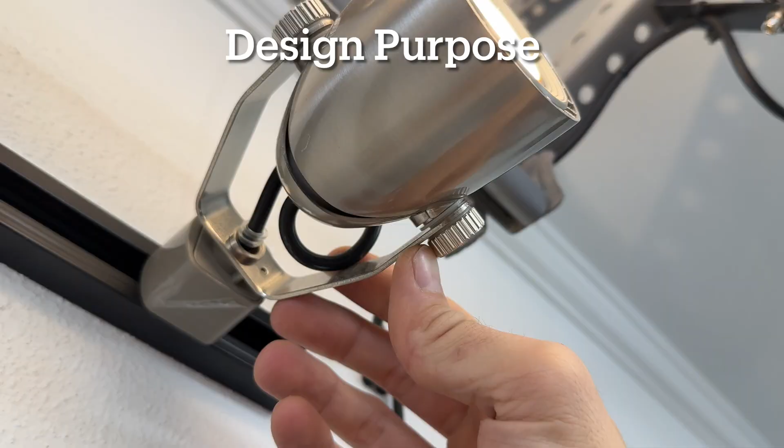Let's start here. Why did I want to make this design? Because I wanted to control a shaft through a thin steel wall. And why would I want that? Well, I can show you. If you look at these lamps, you'll see a thin steel wall and a pin, and the designers took control of the pin in the steel wall. Now you have an adjustable lamp.

If you look at this lamp, you'll see the same. A thin steel wall and a pin taking control of a joint. If you look at this fan, it's a thin steel wall and a pin, and the designers took control to form a dually supported joint. And the same is true here. We have a hole in a thin steel wall that gives us another degree of freedom.

And then if you look back further, we have still a pin in a thin steel wall that carries a load and takes control. If we come over to this television and look at the mount, we have a 4-bar linkage, and we have a pin in a thin steel wall that supports it. And then this beam is just made up of 2 more thin steel walls that are constrained also by the pin. And all throughout this design, it's the same.

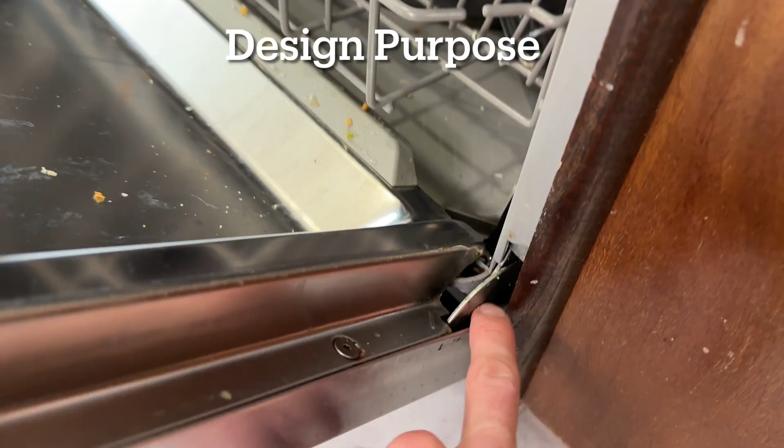If we look at this dishwasher, we have a smooth operation and a supported hinge on this door that's based on a pin going through a thin steel wall here. If you're relaxing on the couch, you're supported by several pins in thin steel walls. And the friction and the movement and the freedom to move is all controlled by the materials and the decisions around that pin in those thin steel walls.

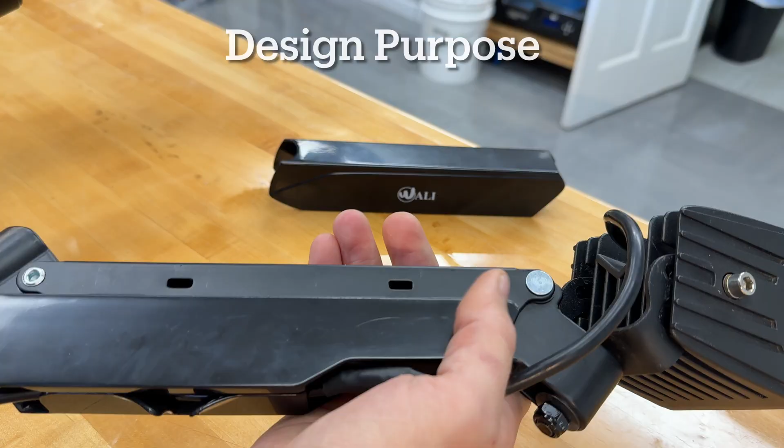If you take apart a monitor mount, an adjustable mount, then you will find these beams that are made up from a pin in a thin steel wall for all of the joints. These are just covered in plastic. In fact, you'll notice the whole world revolves around a pin that goes through a thin steel wall.

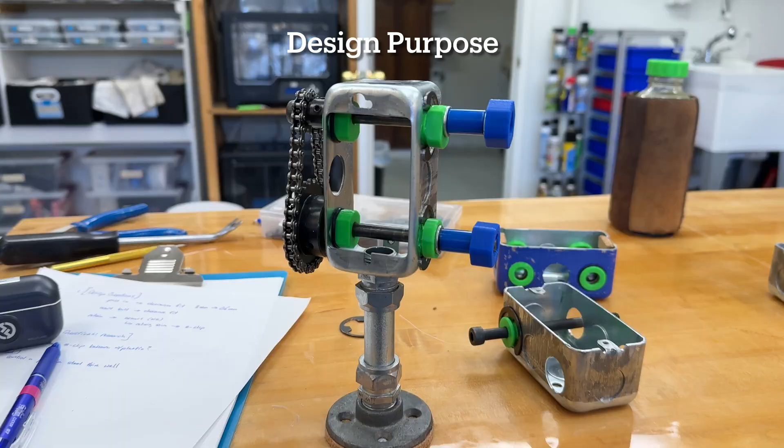So I produced this sleeve and its variations to begin to have for ourselves a set of answers that take control of pins going through steel walls. This apparatus here gives us a gearbox, but the more important thing is to have a really nice set of offerings that give us that control and give us the ability to adjust the design to manipulate that joint right there.

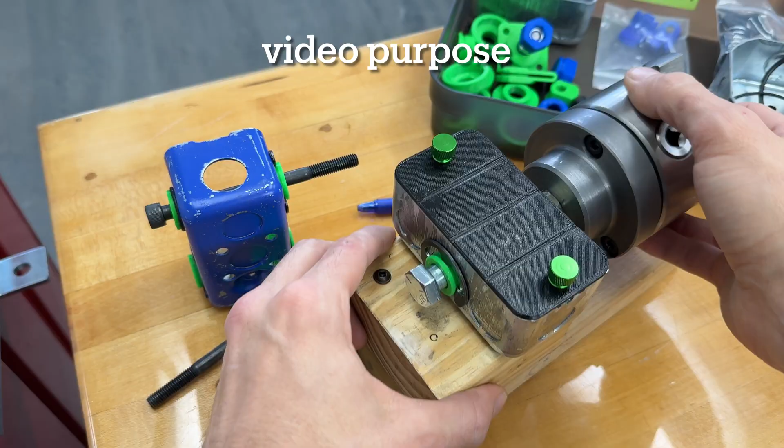You may be getting new ideas on how to plan a design for multiple assemblies and what assemblies are possible to be built with 3D printed parts. So this is another integrated part with off-the-shelf parts, and so I'm using keyword Printegrate for the online posts that have parts like this. And as a designer, even if you're not a mechanical engineer, you should gain some insights as to how you approach the specific problems.

What problems do we encounter when we're trying to create something from scratch to do a job? And how does a mechanical engineer think through a design process and make steps out of it? I should also mention that we're still on track. From 6 months or a year back, I showed people how to throw together this simple joint bracket that holds a big fan, that allows you to position it, that is simply made from the same components we're going to look at today.

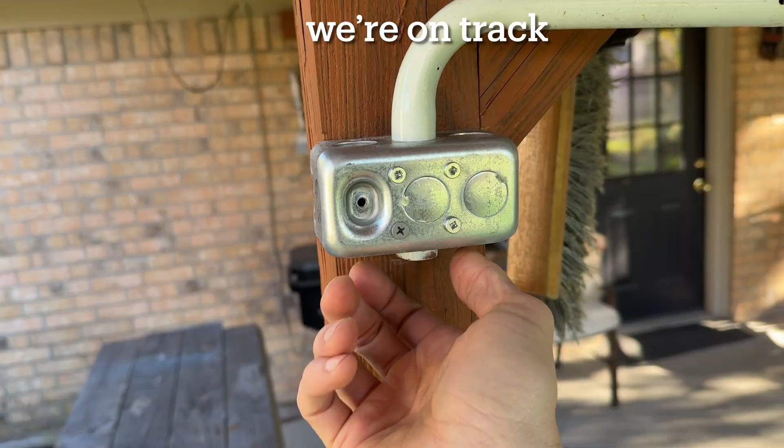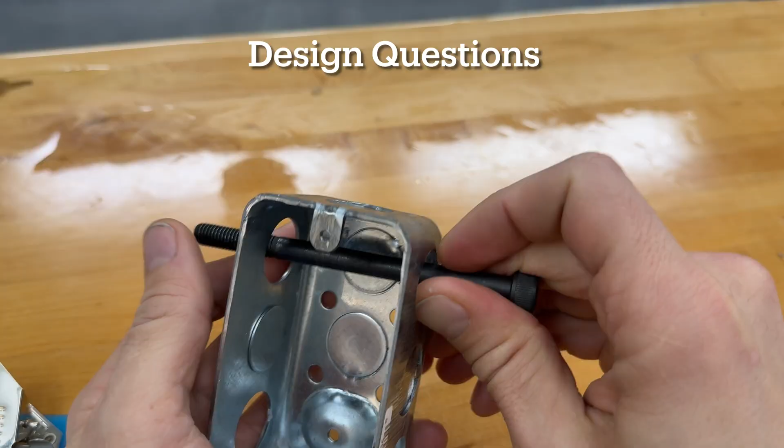And the next steps are to be able to take more control over those joints to control the friction or the clicking. And that means we're going to need some sort of components that give us access to manipulate the joint. And that's where we're going. So I want this bolt to go securely into these holes. Let's just consider one hole. How do I get the bolt to fit?

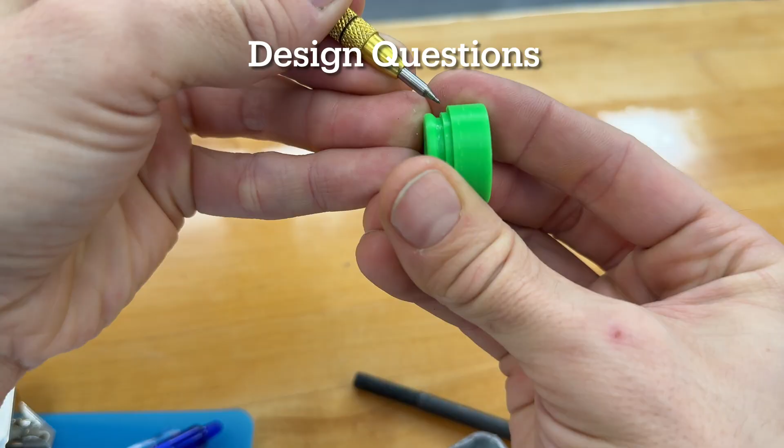Well, I'm going to use a reducer. So I'll reduce that size from large to small, 8 millimeters. How will such a reducer install into this wall? It's going to have a slip fit. It's going to just pass in without pressing. And so that answer of the slip fit is defined in this diameter here, exactly where you'll see the flush wall of my steel on the flush surface located right here.

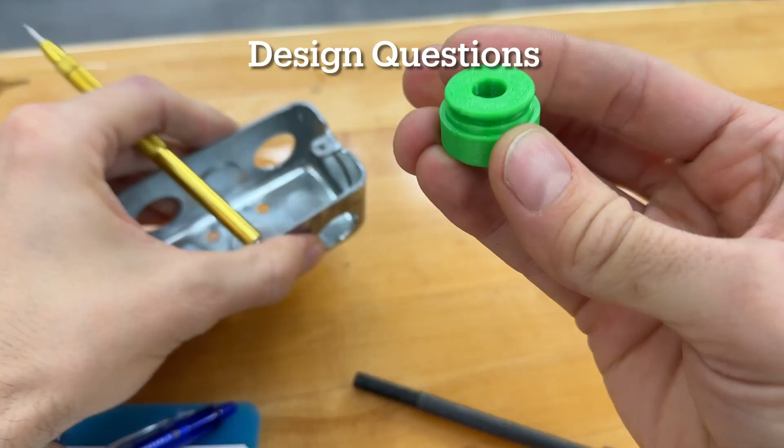How will I prevent the sleeve from passing all the way through and have it just contact and stop here where I want it? Well, that's going to be defined by having a diameter larger. Instead of a slip fit, we're just saying, depending on this diameter, we need a millimeter or two larger than this 22 millimeters. And so that answer is embedded in this diameter right here. Okay, so we have something thin that slips in.

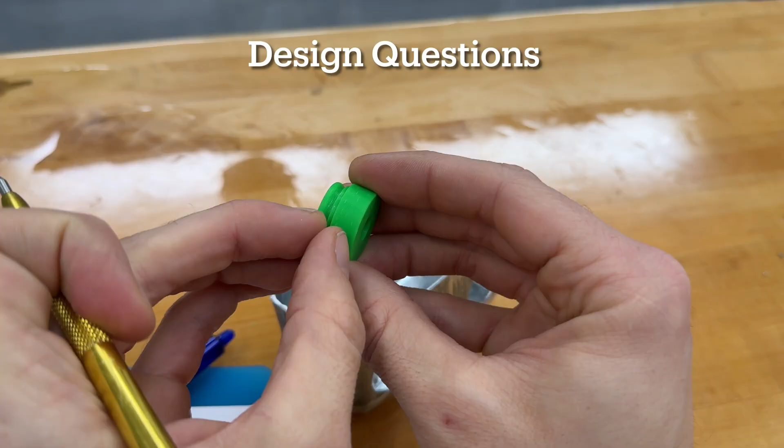Conceptually, we said, how will the bolt fit into this reducing device? Well, it's going to also have a slip fit. And so that hole is defined by the diameter of the screw plus some amount that gives me the clearance fit. And that answer actually is a routine answer, and that lives in a set of design rules.

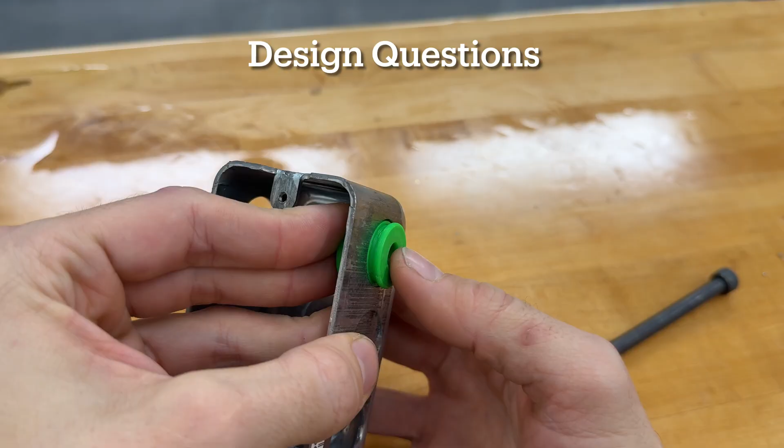Okay, so then we ask, how will we install it? Or rather, how will we secure it after we put it in? And it's going to need some kind of hardware or fastener or clamping. How do I maintain this flush against that wall so that it makes contact and we don't have movement in this direction? So that's answered first by an E-clip.

This is fairly standard in some automotive applications. And they're ubiquitous, long-standing parts found in several trades, found all around, low cost. And so I grabbed one of these to try it out. Now, how will we mate with the E-clip? How will we make sure that this thing accepts this E-clip?

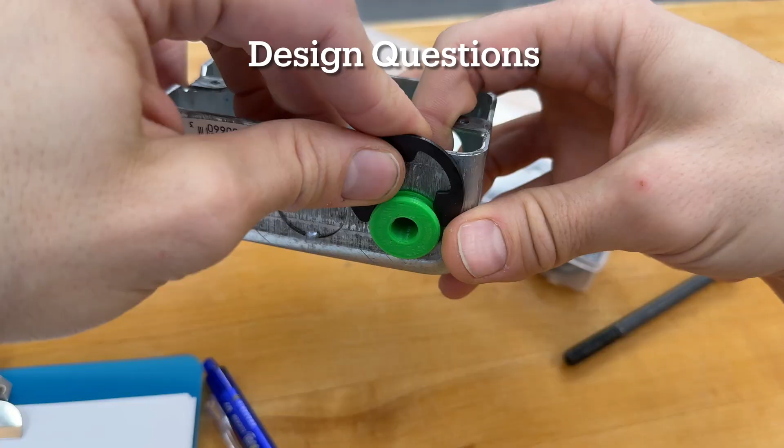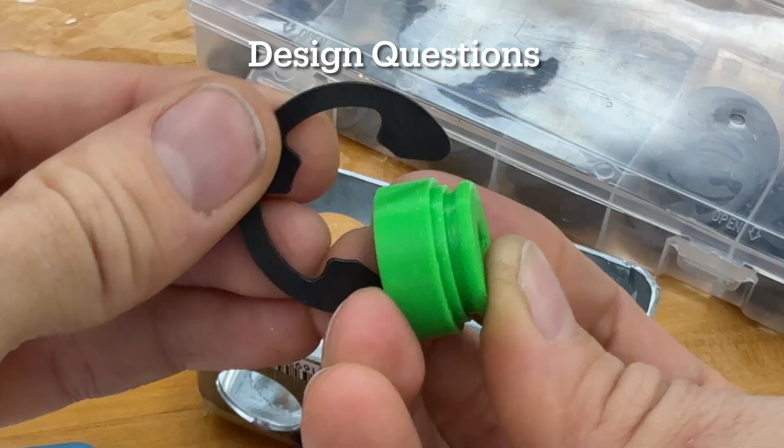That is going to be a matter of, these are designated for a certain diameter, essentially the diameter you'd measure around here, plus or minus some range. And so we take that information about this diameter and that gets plugged into this groove. So we have mating, let's zoom in. We have mating with the wall, then we have flush with the interior wall, and then we have a diameter here, and that is an answer to the question of what diameter will fit with the E-clip. Retaining ring, or C-clip sometimes they're called.

And then how wide of a groove do we need to accept this E-clip? Well, that's also defined by the E-clip geometry, and it's relating to the thickness of that E-clip. So we make a groove equal to that thickness, and then you can see it seems a little bit larger, but it's tapered.

And that is a question of, how will my 3D printed model allow 3D printing without supports? Well, then we're not going to have overhangs. That's the answer to that question. And so we add this chamfer here, that's going to eliminate that horizontal overhang. So that makes it easier to 3D print.

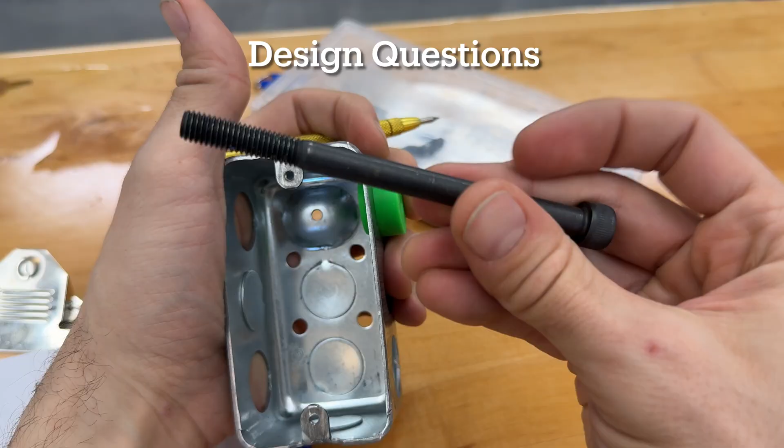So you can start to see that each one of the design questions can be enumerated, and if you're designing systematically, they can be matched to a feature or a dimension inside your CAD model. Once we got that far, then you would have this bolt or shaft pass in, and it would probably start to wobble because we have a slip fit here. And so you have some play that's going to be allowed unless these are drilled. Post-processing, we want to eliminate post-processing.

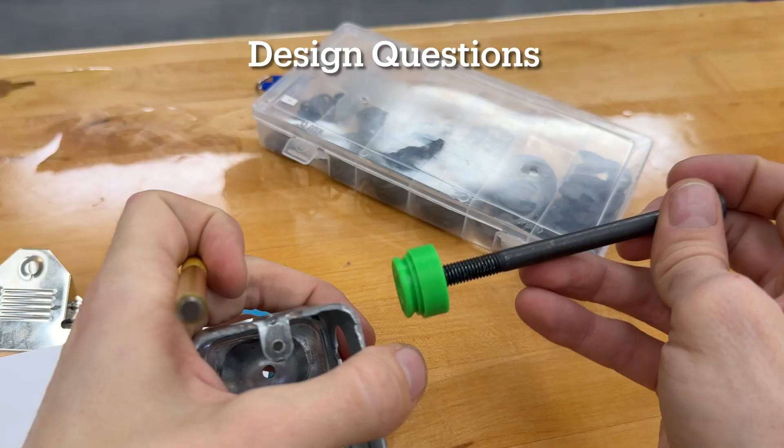So how can we keep it from tilting this far and this far? Well, then we're going to add a thickness on this side. Prior to this design question, we didn't have all this thickness. We just had a millimeter or so here, which is less support on the shaft. So you can imagine now we're contacting the shaft in a range, let's say as wide as my finger. And this is a ballpark choice of 10 or 12 millimeters. And it is simply large enough to control the alignment of the shaft in general.

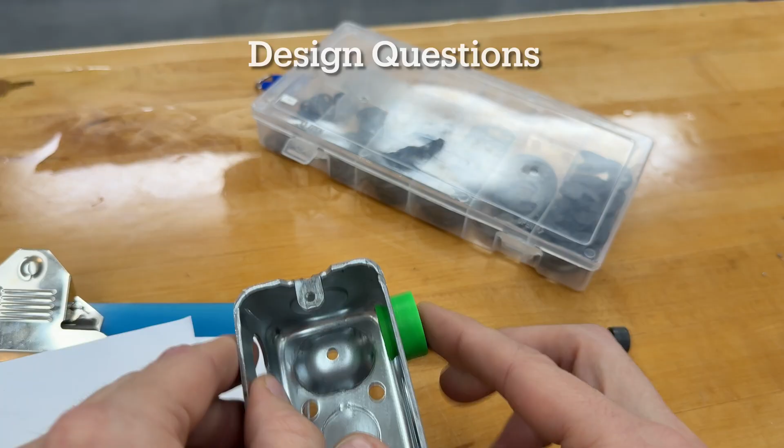And then controlling more carefully will be the job of having 2 of these that will increase the constraint from this narrow range to all the way out here. Elongating that constrained circular region gives us a more careful alignment of this shaft being parallel to the floor where this is set down.

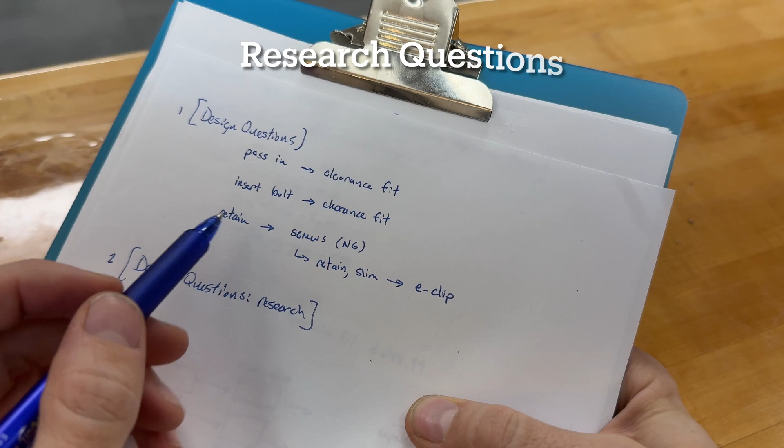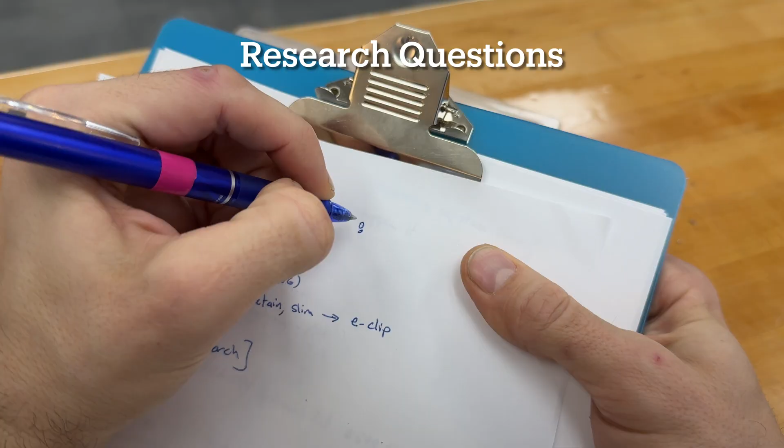All of the questions so far that are answered in that design are general design questions. By that I mean that these answers can be borrowed from other parts. They can be taken from my design rules because I'm using those answers all of the time. For instance, what is the size of the clearance fit? Well, we took an 8mm shaft. Then we always add 0.6. I always add 0.6 millimeters to that design for 3D printing, in the case where we're printing in this direction. So 0.6 is related to overbuild, and I'll talk about that another time.

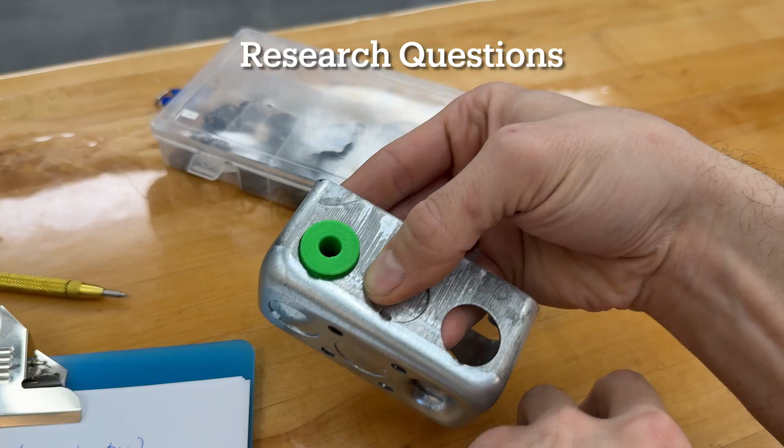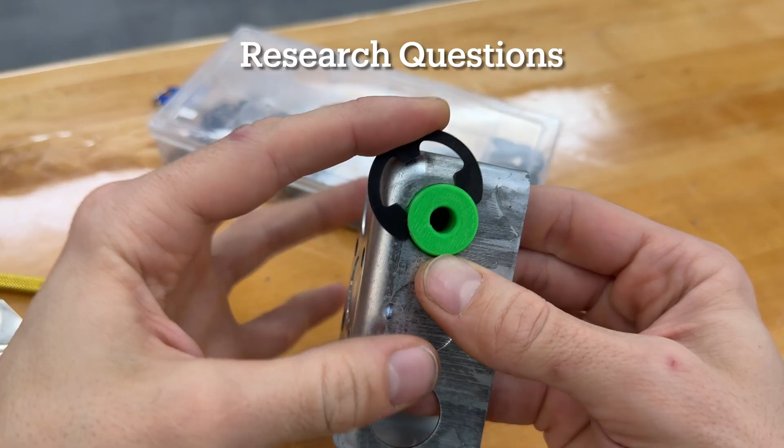Then you have the questions that are a little bit more detailed, such as if you place this in here, and then we're using this retaining ring, which is designed usually for contacting metals. It has a really strong pinching force in this direction, and it has that force concentrated on these narrow regions when it's being inserted. So then the question is, is this metal going to be too much force? Or if I install this 2 times and remove it, is it going to damage that printed plastic?

And if I'm just printing with ordinary settings, then I have a hollow region. Actually, this is 30% infill on this part. Am I going to have a fight between my printer settings and the survival of this plastic? That is something that we can't really compute.

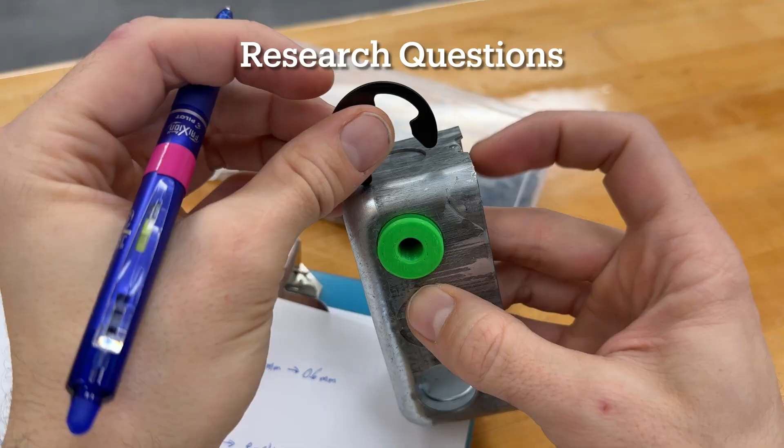It would be unreasonable to try to put that into an FEA simulation or something when you could instead just print the part and do some verification. So we're going to specifically observe, this is my activity, specifically observe pushing this on.

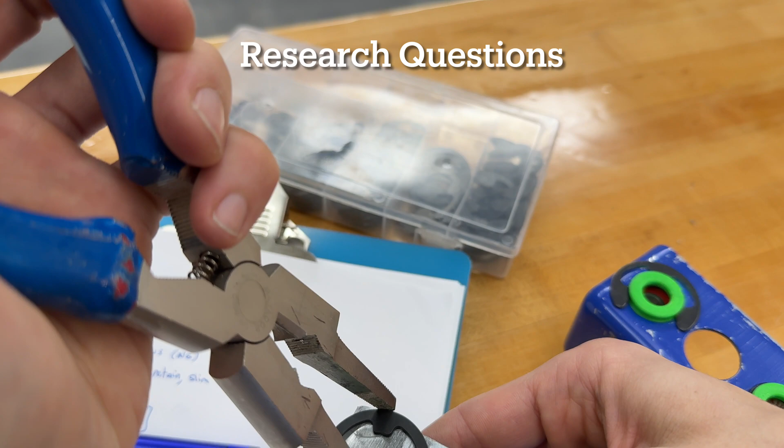The answer to that question was interesting. I was able to install this multiple times. The installation goes with some pliers. You'll need a tool because it's really hard to push that with your fingers. And well, I don't know if I can demonstrate right on camera, but okay. So it goes on pretty neat.

And when I remove that, you will find a little bit of superficial damage on the plastic. It looks like it's not changing the net shape, but the plastic is surviving good enough we could get by. However, installing and uninstalling multiple times leads me to discover that that's just difficult. And if you use a tool, you're going to have to be very careful not to jab your fingers or something like that. And so I've modified the C-clip in this case.

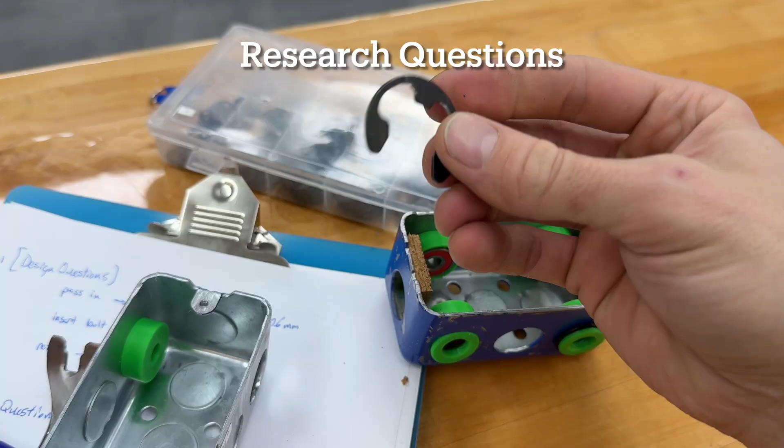So this C-clip is the exact same part as this, but it has been reduced in the spring force it takes to close it. The net interior diameter has no change, but we've reduced the spring force by reducing the thickness of that spring region, just by grinding it out with basically a Dremel and some carbide. You could equally do that with a file.

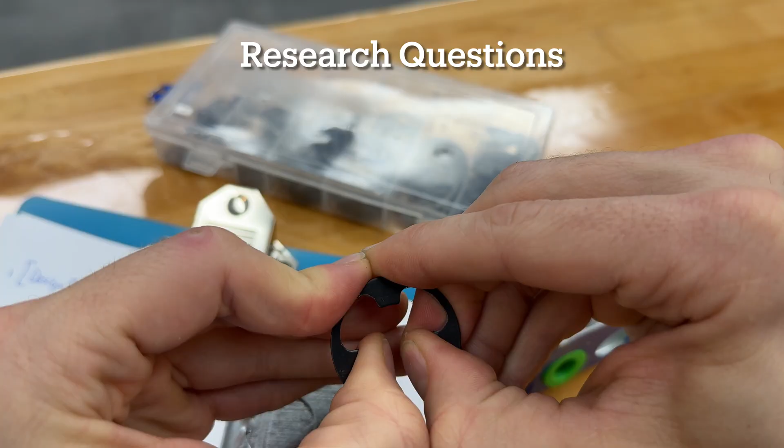And so that was the answer to the research question of how does it work out trying to install these on plastic. And it's a little bit easier to handle it with your fingers and just get a sense of the force that it's going to take to install it, etc. So now we have a brand new option. We have the option of if your off-the-shelf part fits nicely, you can do that.

But if you want to be able to turn it and adjust it, let's say this edge is going to interfere with the interior corner of the wall. So you've got to install it this way, etc. You get more control by taking a moment to grind these, or you could grind down the corners, etc. It can go further and further, the discovery of options that you have.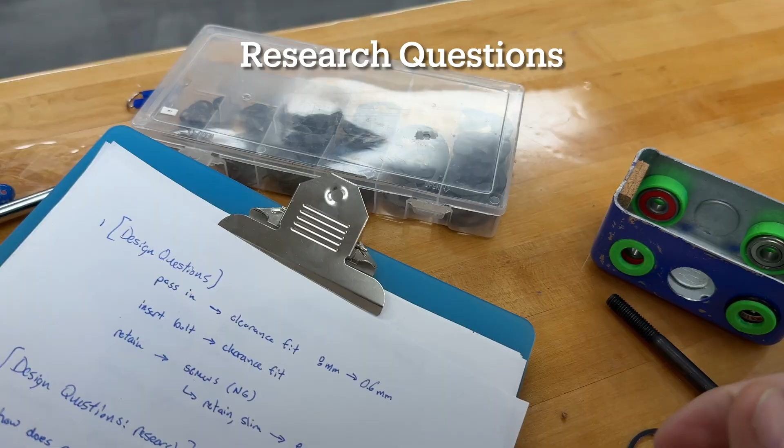But the simplest option is described simply. I can measure this and prescribe this for the design and say it's going to have an E-clip, and you're going to have only 2mm spring arms on it. And so I would consider that type of question that requires some exploration and data gathering the research design questions. But once these are done, once we've accumulated these, and I've accumulated a lot so far, we then have new options that we can just copy and paste in other designs.

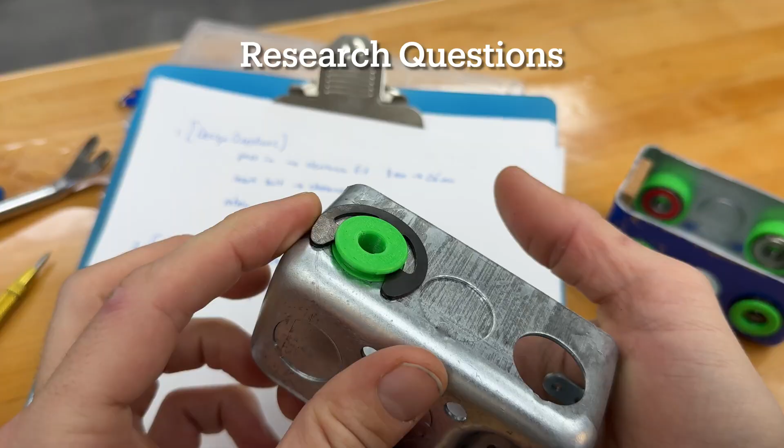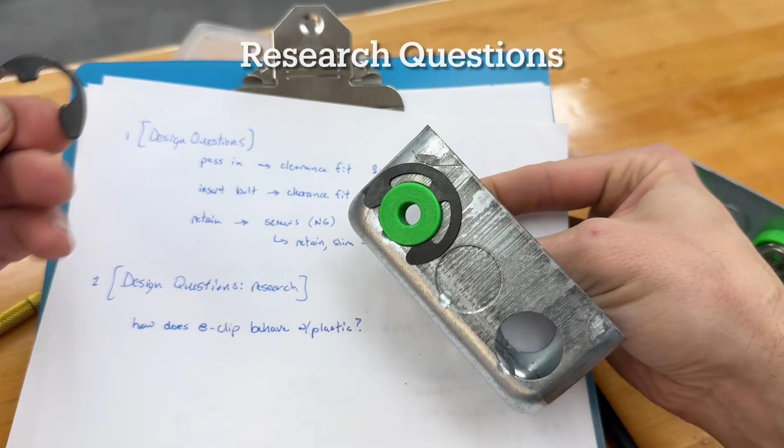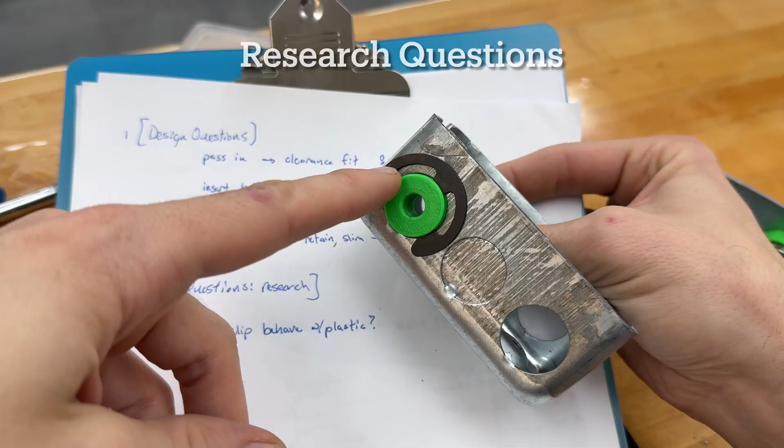And since these are extremely popular, and 3D printing with ABS is very popular, if I include this data, other people can reuse that solution in many other situations. It's just a matter of how many research questions, which questions am I answering in my documentation, and how do I describe that sufficiently to transfer the understanding to the audience. That moves it down from a research question into a design question. The next person can just say, how do I retain the thing? Well, I can use an E-clip that's been reduced in its spring force.

Okay, so all of this design discussion only matters if the assembly can actually bear a load, which it can. So I'll show you jumping ahead and running a test on one of these parts. Just understand there's a few variations. You'll see the one that has the bearing, and all these variations have the same geometry in common, which bears the load. So we make a press fit of the bearing into the part, and then we install it.

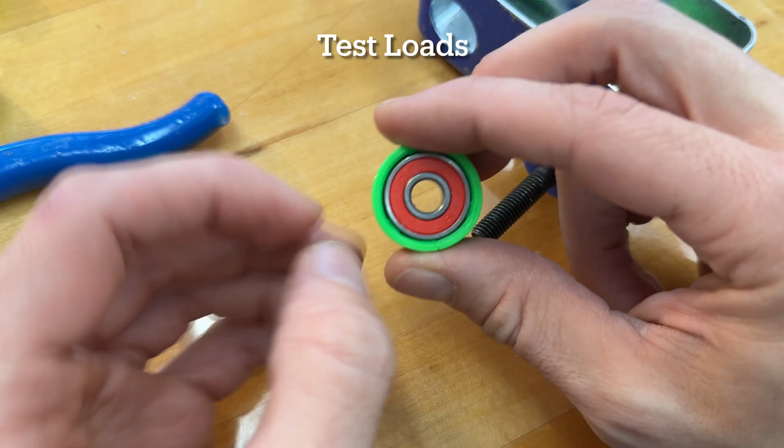And what we're going to have is when the shaft pushes down on the bearing, it's going to want to tilt like this. It's going to be pulling on some of the features because there's a moment on the part. Only if the bearing was centered directly over that wall could we have no tilting or twisting and no moment. So given that constraint, that limitation, how much weight can we hold? So far I've tested only using this method.

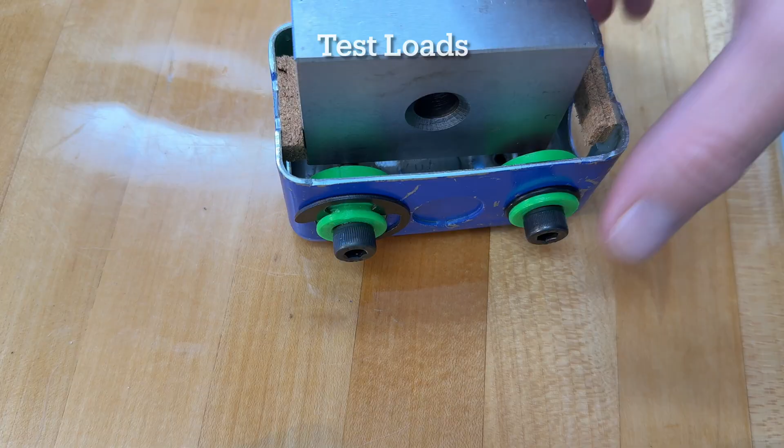So I set a block on top of those shafts. I keep it from slipping out of place with those pieces of cork, and then we can start pressing on it. And to press more, I can come over here, set the wood on it. I'm going to steady my hands on this bench, but I'm going to put my weight on the assembly.

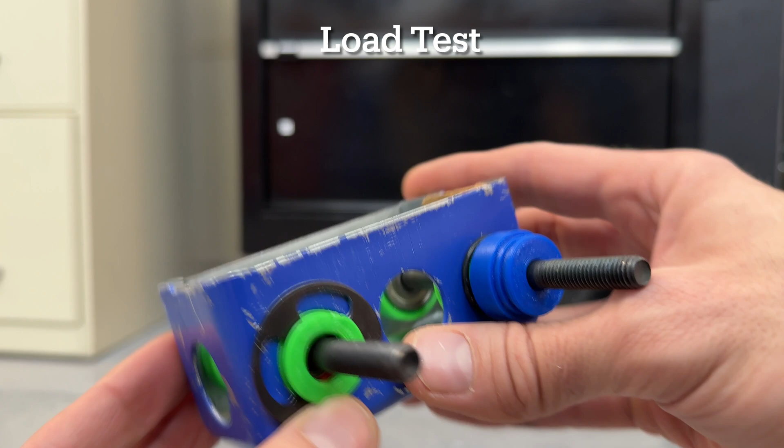Okay, so I can stand on there. Oh, I just tilted back to my heel. I'm sure that I just put all of my weight on there. And so we have no problems, no defect from performing these tests.

So that, even if we don't use it in that heavy of a range, we have a really good starting point to know what applications, what span of loads we can tolerate on an assembly like this.

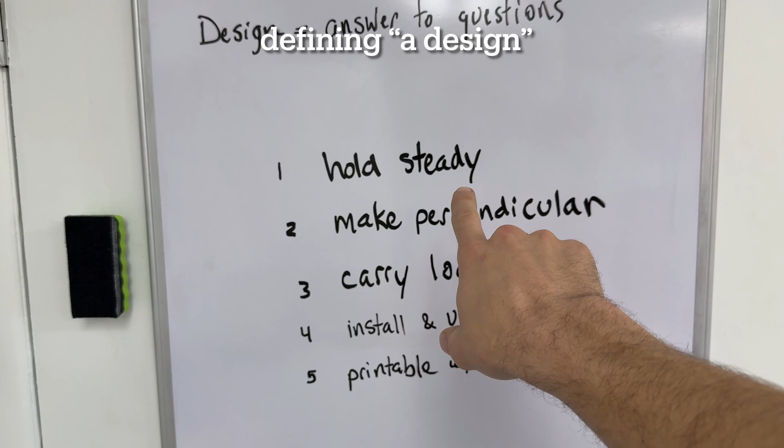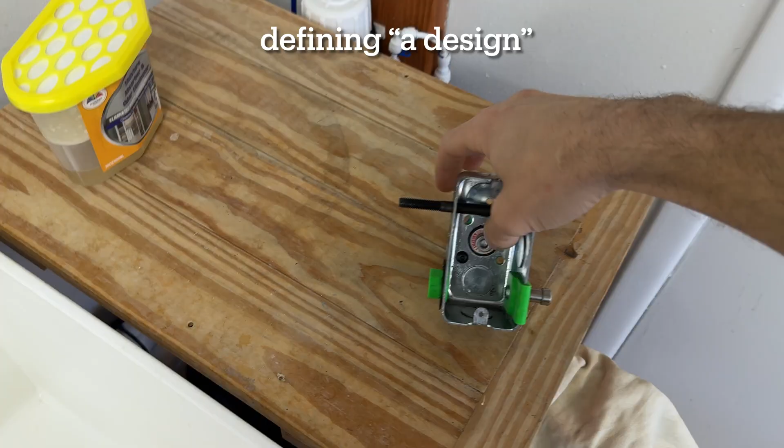Okay, now I'm going to voice over a little bit and improve this explanation. I took a moment to carefully define design because we have a more complicated situation than a typical design. We're creating a parametric part, and then that part is developing sister parts or children parts that have some similarities and some differences. The first 5 questions that I wrote in black are considered to be the questions answered for this initial design. The bushing style part, which has no bearings and it has the simplest geometry.

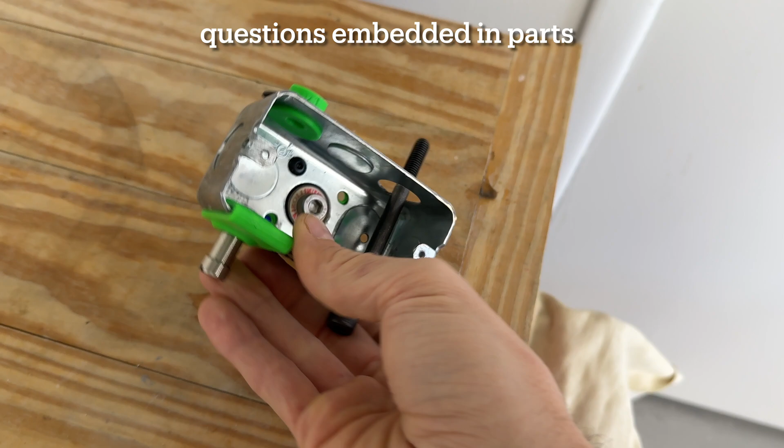Each of the numbered items, such as number 1, it says hold steady. That is corresponding to a question. How will we hold the shaft steady? And we mentioned the answer. It's going to have a slip fit, but it'll sit resting on the interior hull of the part.

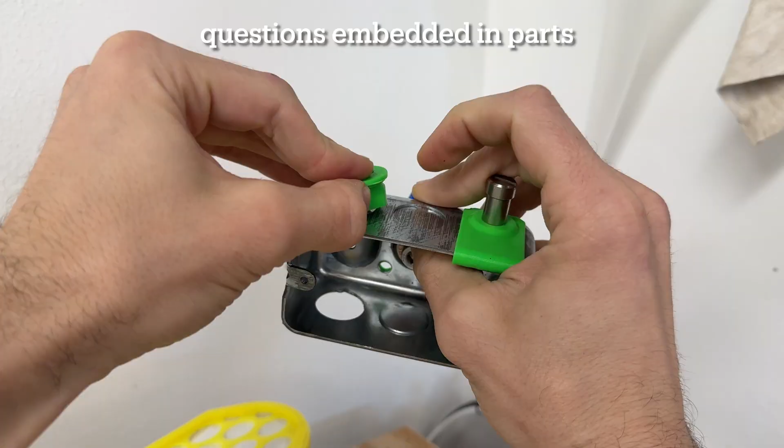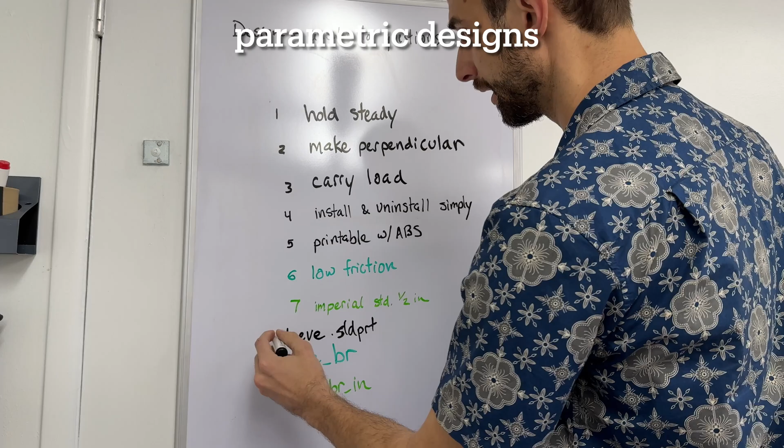And so each of these questions, well, these answers aren't written down in words anywhere. They are built into the geometry of that physical part. And they are stored, for instance, in the CAD model. They get carried over to the physical part that gets printed. So when I publish this design and call it sleeve, that's sleeve.sldprt. That's a design that takes all questions 1 through 5 and delivers an answer.

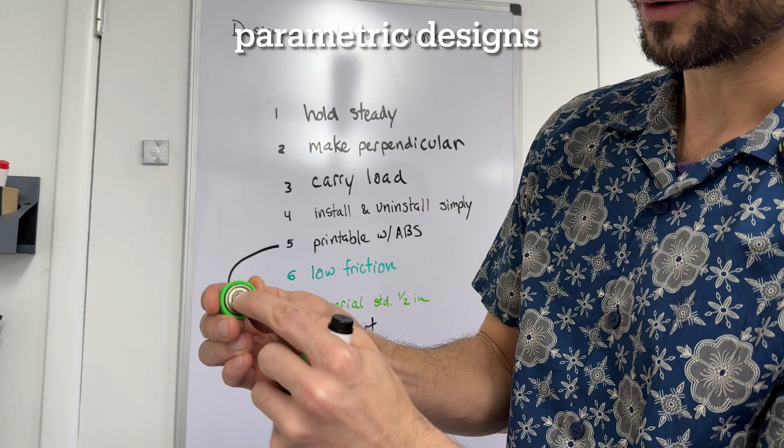And then to demonstrate adding on another criteria to the same set of answers, as intended from the very start, we have the same design where most of the features are in common because those features answer these questions. So sleeve BR is for a sleeve with a bearing, and it simply has a widened shell, and now it carries this bearing for an 8mm shaft. It's a 608 bearing. And so if you want 1 through 6, those are in the file called sleeve BR, but the file starts to get more complicated.

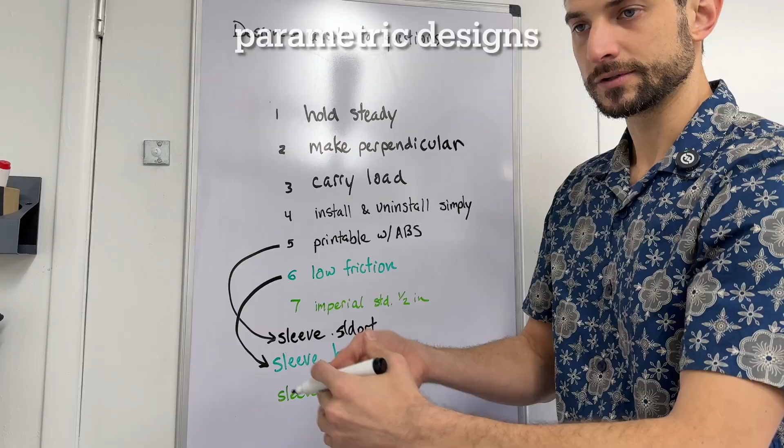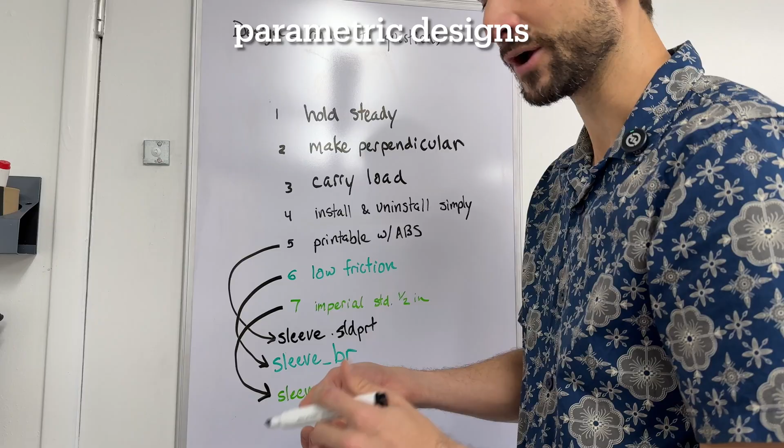So this is where my methods break off from traditional engineering design methods. We have a second part, which you could consider a version 2, that enhances the design for one specific application, but not for every application. So I want to take this group of features, all in the CAD model, where we have answered a cohesive set of questions before proceeding, and save this and give it a name, and then describe in documentation what is the function of that specific part, so other users can download and access and reuse the solutions that are already embedded in the part, and then proceed to make a second version and give it a name.

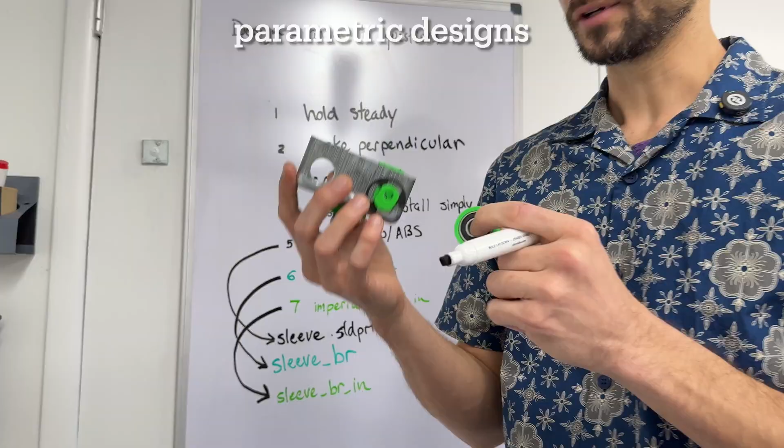So here are these 3 parts side by side. Sleeve, which was made first, sleeve BR that was derived from this one, and BR inch, which was derived from this one. And each time I made changes to add value, right? But some of those changes remove value that lives inside of this one. So for example, if you want an assembly that's low cost and minimal, you don't need this ultra low friction, then you wouldn't want to spend the money on these bearings. And so each one of them deserves to exist. That's why I'm publishing multiple solid files instead of just one.

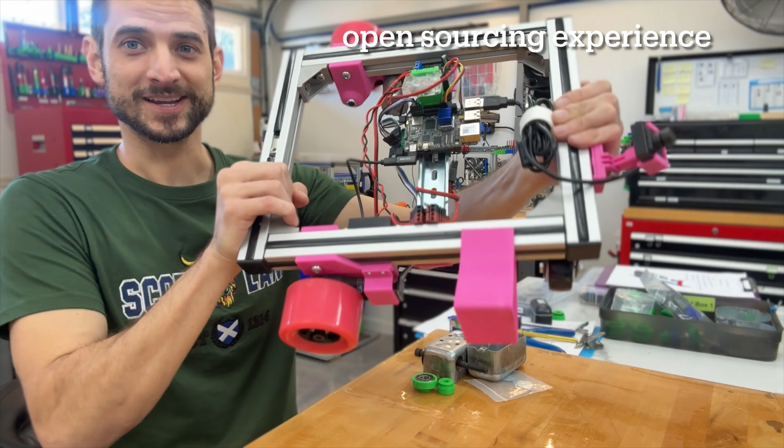I'll add a personal note here that can only come from experience. Okay, so you have this open source robot. It has 100 very useful, very versatile components. It was specifically designed so that the modules inside would have their own value in student projects. That's all related to my role as an educator at the university. But inside that design, nobody is actually discovering the parts and the components and the value of those parts.

So I've published this robot, we're talking years ago. Let's say you get 100 downloads on GrabCAD and truly any other platform. No one's expecting that we're designing in this way to actually help them. So I'll publish this, get 100 downloads, and then separately later, I'm like, there's so much more in here. I'll publish the design of this little fan or this little terminal. And that design will get 5,000 downloads in a month.

And it's just showing, it's because no one is expecting that the assembly and the parts inside of a large design are made up to the quality that those components are actually helpful to them. And that makes sense. It's not an ordinary thing. We don't put the details usually into all of our parts in such a manner that this bracket here, this design that I publish on the robot, is more useful to you than getting this design from the manufacturer, because I cleaned up the model and made it easier to work with and added names and datums and everything that the engineers need to proceed from there.

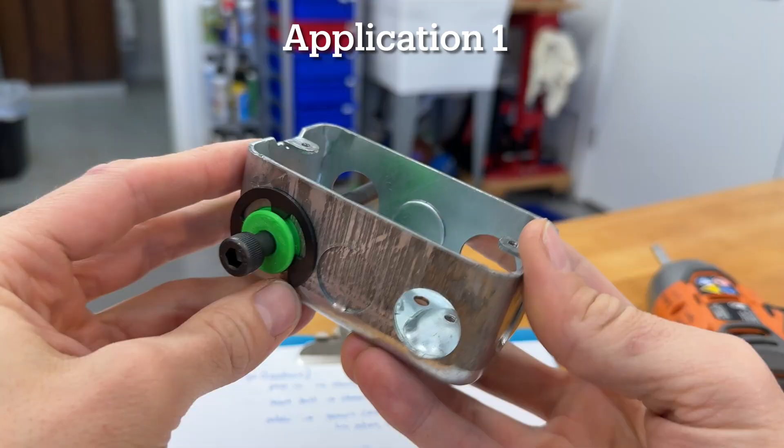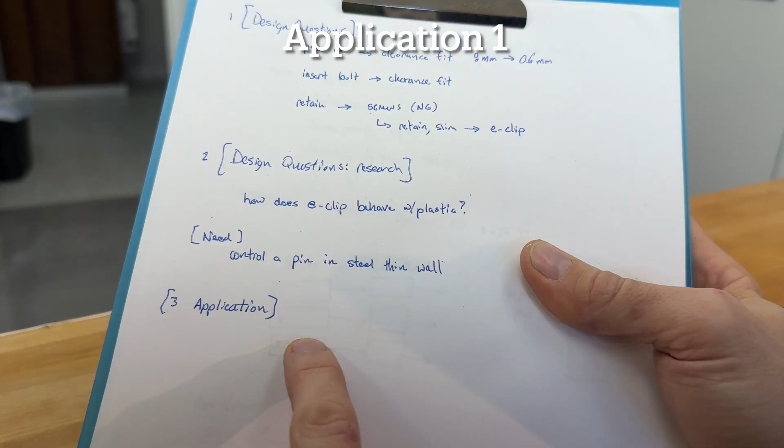Okay, we have a design, we have a sleeve. Now, if we install 2 of these, we support a shaft. If we install 2 more, we could have 2 shafts. Maybe that's the simplest application we can go to. But we covered design questions and the need. Now, one of those needs can fit in an application, and that looks like this.

We have a gearbox or a belt box, not sure. Anyway, we can use a chain, or we could use any other driving mechanism, such as a belt, or even a simple O-ring made to be used as a belt. In this case, we have a 25-tooth pulley on the input shaft and an output shaft with 10 teeth. So it's a 2.5 times increase if we're driving the system from this side.

So if I drive it with my driver, it spins. We have everything moving. And this can handle a fair amount of torque. There hasn't been much testing yet. But in any case, that works. And so we could continue with that example. What might I get? What would I want that for?

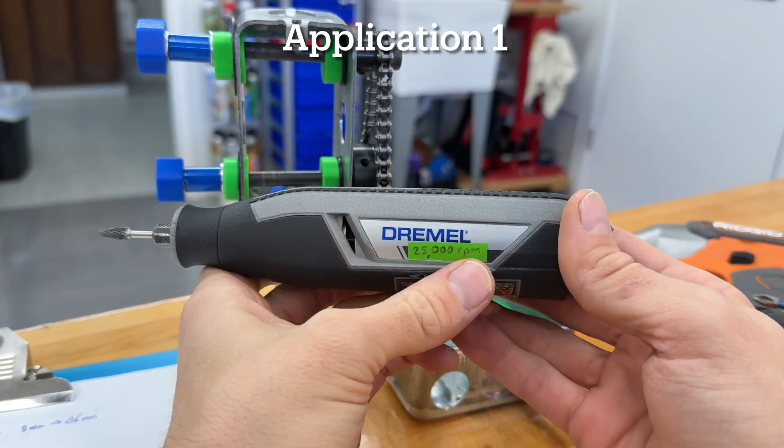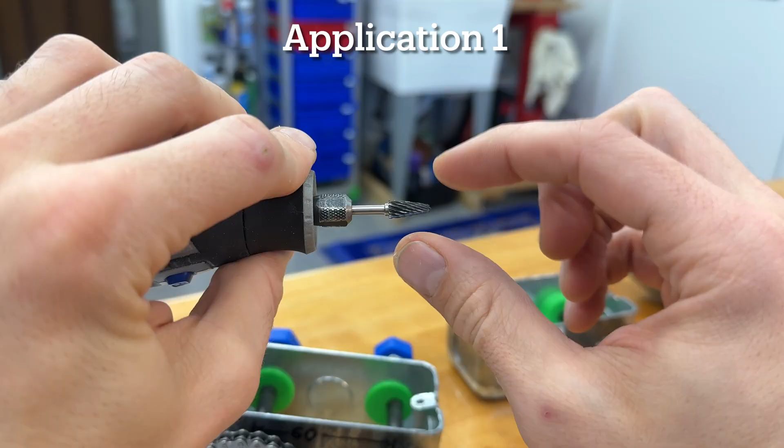One example is a high-speed tool, just like a Dremel, only having more torque, which is something that I very much need. We could make this to be mounted on a bench top, and that's something I actually want, a bench top mounted driving tool to drive these tools that have a 1/8 inch shaft or 3.2 millimeter shaft, like this carbide burr, because when you have this high speed, it's a whole different range of utility compared with the lower speed tools.

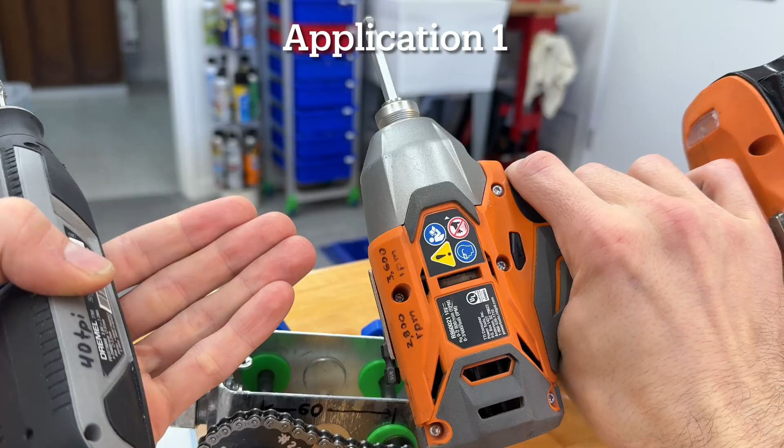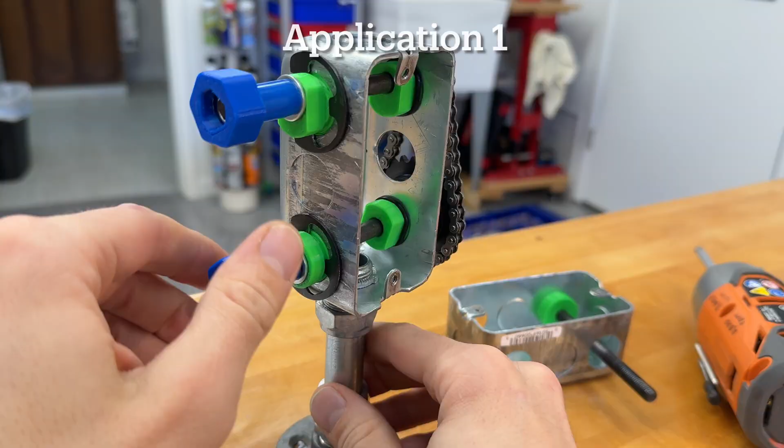Almost everything in our shops is somewhere around 3,000 and less RPMs, whereas this one goes up to 25,000 RPMs. And it really changes the functionality. It changes which devices you'd want to connect with it. And so I'd like to work towards that, and maybe many other people will work towards their own applications or the same, and that can be a collaborative thing. But at least now we have one demonstration that we can make our initial observations and start to test and examine what's possible and what would need to be adjusted.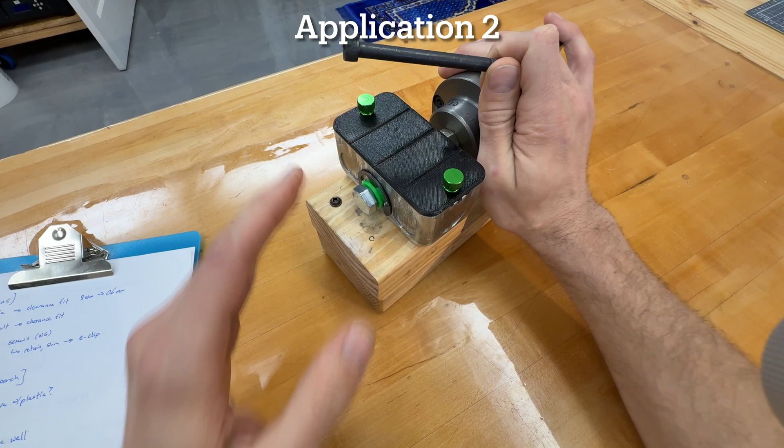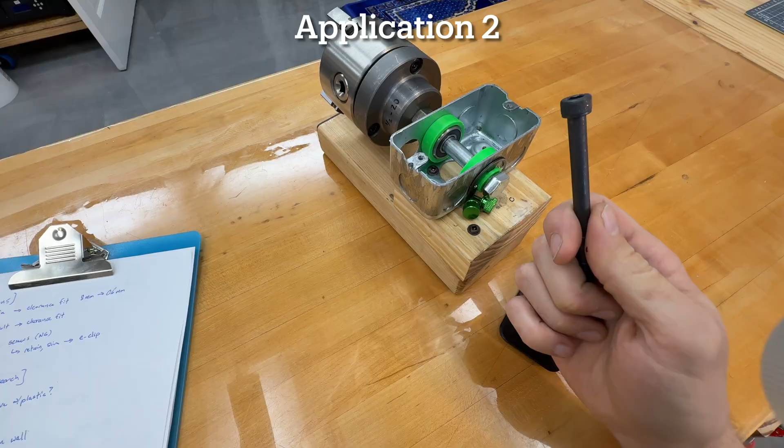The next application demonstrates meeting a completely different outcome with mostly the same needs. And so this same sleeve is being used. And this is a variation of the model, mostly with shared features and then the added bearing. And this is the bearing that has a 1/2 inch inner diameter. And so for this part, 90% of the work was already done in the initial design. We add a very small effort to accommodate that bearing, and then we can do a completely different thing.

I'm not really intending to use this assembly. I wanted to tinker, and I wanted to explore, well, how much load can we put in this steel box, and how much will things fall apart if we start to spin it? And so that is a significant amount of mass, and that's just giving me more data that I can use to decide on what configurations, what are the limitations of the parts directly 3D printed as they are.

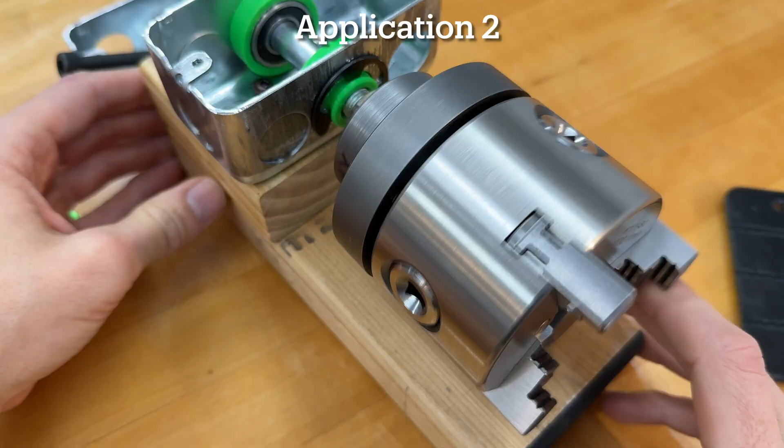Well, this whole situation starts with observations. I don't have too much to say about it because this was a quick project just for me to play. You can see I screwed these into the 2x4 just to get something mounted and to be able to get this lathe chuck spinning. This is around $60 on Amazon, and so now we are seeing this printegration.

Integrating these off-the-shelf parts gives us easy access to start configuring a machine however you want to, if you want to configure the drive, the driving input, spinning shaft the way that you want to, and the speed that you want to. Now we're starting to get that freedom.

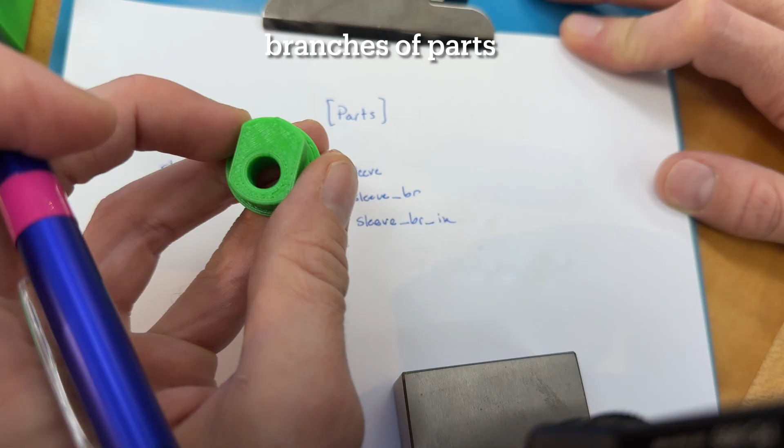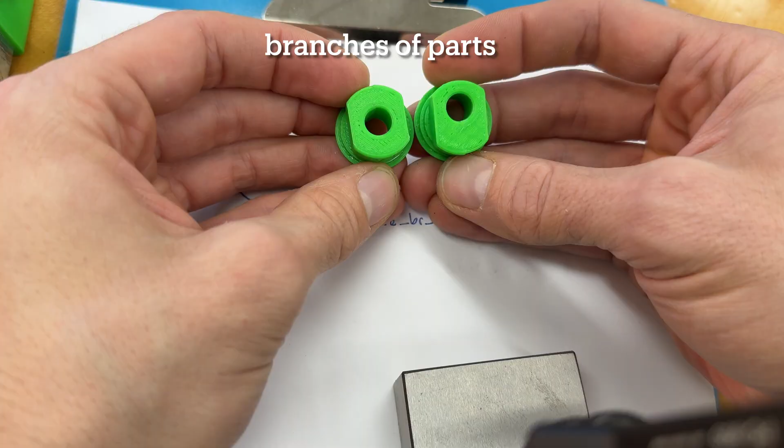So we basically have these three parts forming a tree where most of the work and most of the trouble to find answers and test things out was performed on this main branch, that sleeve solid part. These ones are derived. Okay, now why do I not just make three configurations of one file? Why am I publishing three files? That's where we come and we find that there's been branched off already this sleeve variation where we have the offset and the centered version. Those already come from inside of sleeve.

And so you have sleeve OFS for offset. That's the one that has the 3 millimeters moved over center line. Okay, but the sleeve OFS, this is a configuration inside of sleeve, and it's defined by having this dimension here where we have our offset distance. And so that's offset. That's a variable that lives inside the CAD model.

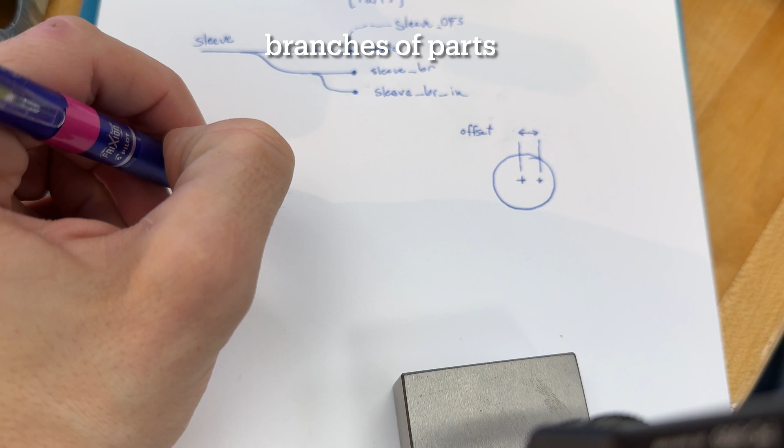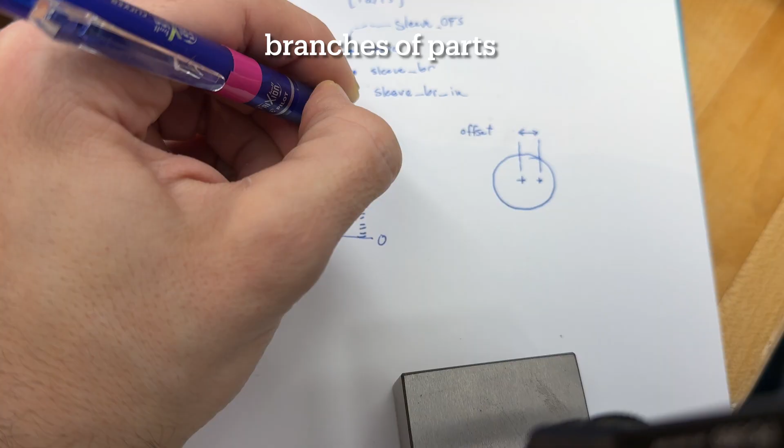And any designer can open up the file and adjust that. And so we have not just different configurations with this parameter, but a whole range that you can make this 0, or maybe you can go all the way up to 5 millimeters. And you can place that anywhere that you need to.

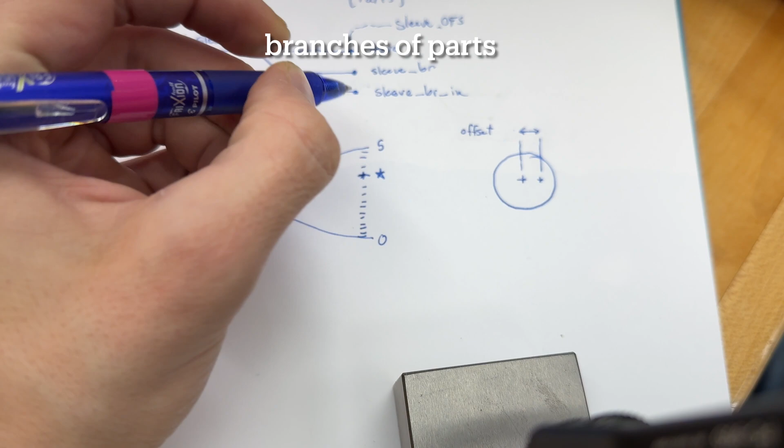And if I were designing the next assembly, let's say I'm going to use this rubber belt and I want an exact offset, then I'm going to choose a new value for this. And I'm going to then produce, let's say, the STL model and then print. And this may be saved inside of a folder that has all the other parts for my belt-driven assembly. So this is one parameter, and that's the offset.

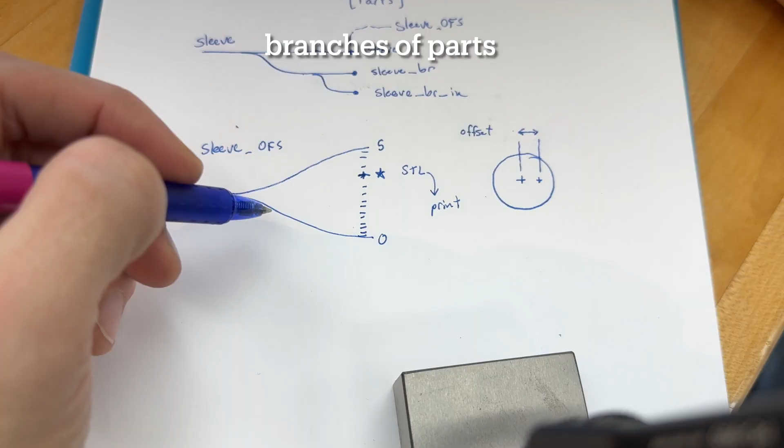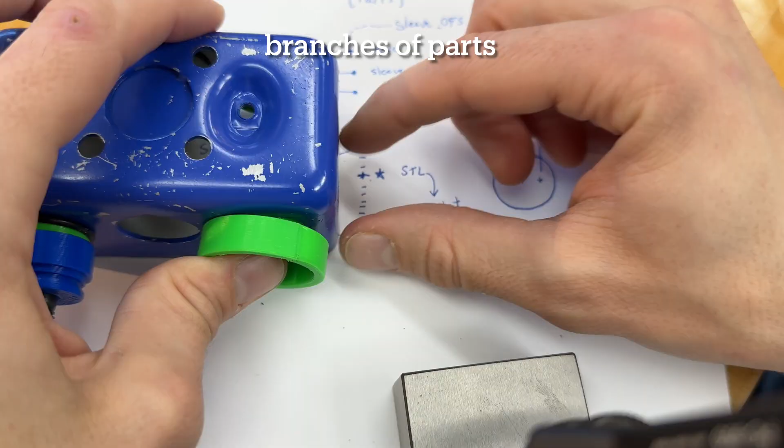There are a couple of other parameters as well. So for example, this series of humps that's intended to mate with this is called a 1/2-inch trade size. The hole in this box, it's because it goes with the 1/2-inch trade. It's much larger than a 1/2 inch, 22-ish millimeters. That goes with the EMT conduit, that's 1/2 inch. And we have 3/4 inch. And we also have unlimited numbers of holes in every other thin-walled steel or metal apparatus.

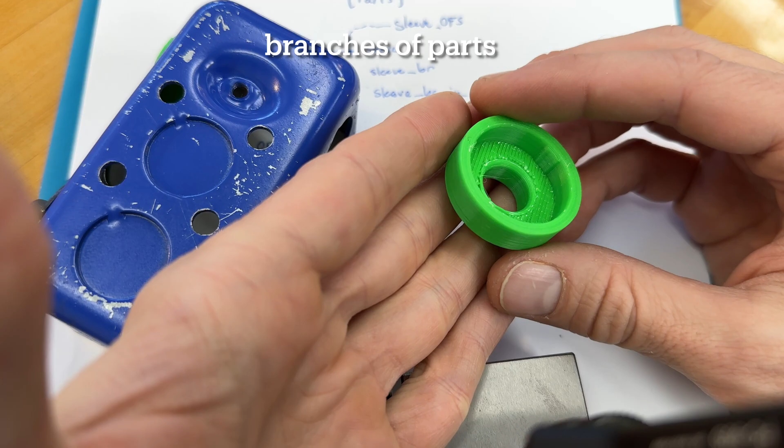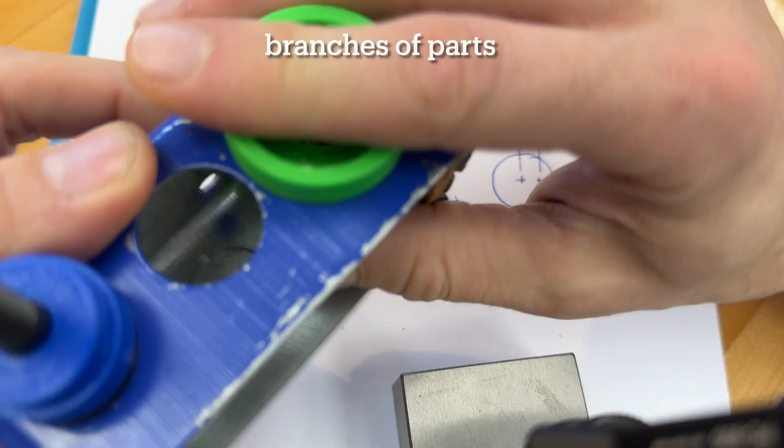You may want to change the thickness of this region here for a different thickness of a wall. This part still has enough engineering in it that it's worth it to copy the part or copy those features rather than reproducing all of the exploration that it takes. We know that it works. We know how much gap you need between the dimension of this and the dimension of a hole. And so you can retain that, make several adjustments of variables, and then reproduce that design very, very quickly. So how does all that look in the CAD model?

Well, we come from the feature tree, that's the default tab, over to Configuration Manager. And if you were to just open this and start working with it, you'll see these two configurations. It's a double click to go to the offset configuration or to go back to this one. And when you go into those, oops, hey, stop that. You can see this cut rectangle, for example. It is simply suppressed. So the feature is added. The information is still in this file, but it is not manifesting itself. And that's exactly the same as commenting out our code.

Okay, from this point, I think I'll do a voiceover to abbreviate this section I had recorded because we're kind of going into the details of how this functions inside the CAD model, but that's all depending on somebody who's using SolidWorks. However, the workflows are similar in all of the other CAD programs. It's just a question of whether the designer actually implemented more layers of detail in a CAD model or not.

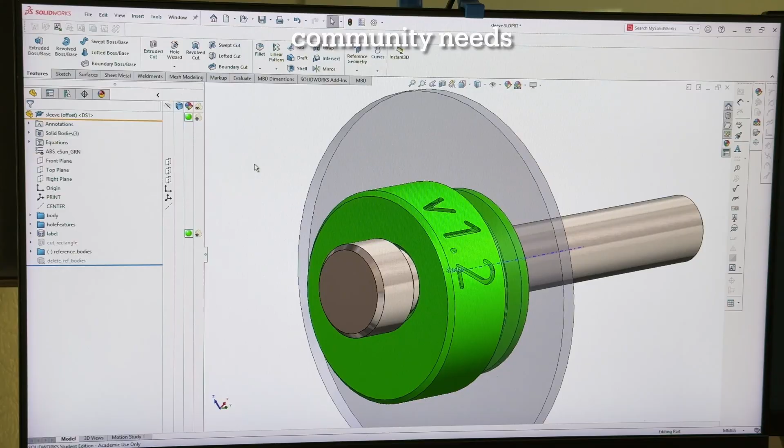And so that discussion of how to handle these details on the possible variations of parts and still maintain the functionality and potentially make these designs and their options more available to users way outside of mechanical engineering or outside of the expertise with SolidWorks, that's what we want to go for ultimately. And so for details on files, I will maybe put this together in a different video.

Hopefully you get a sense from this video altogether that we're extremely close to a world where tons of mechanical things can be simply downloaded for free and printed by people that are not engineers, but simply have some hands-on interest in building things. So for me, this is one part out of a series that will go, first of all, to my students that are engineering undergrads, and then if they're doing an electronics project, they have some template parts on mechanical projects that they can equip themselves on the discipline that they're not experts in. It's something that we should have had from the beginning.

If you were to open up a mechanical engineering textbook like this Shigley's Mechanical Engineering Design, I've got these little bookmark tabs wherever a major section is listed, and it doesn't actually take all that many parametric parts to cover the 90% range of mechanical things that we would want. It can all be really easy if we follow a few rules, which is design for 3D printing, design to integrate the most important off-the-shelf parts, and design open source in a way that leaves it accessible when we get to that stage where online we figure out how to really distribute and make these available and understandable for everybody.